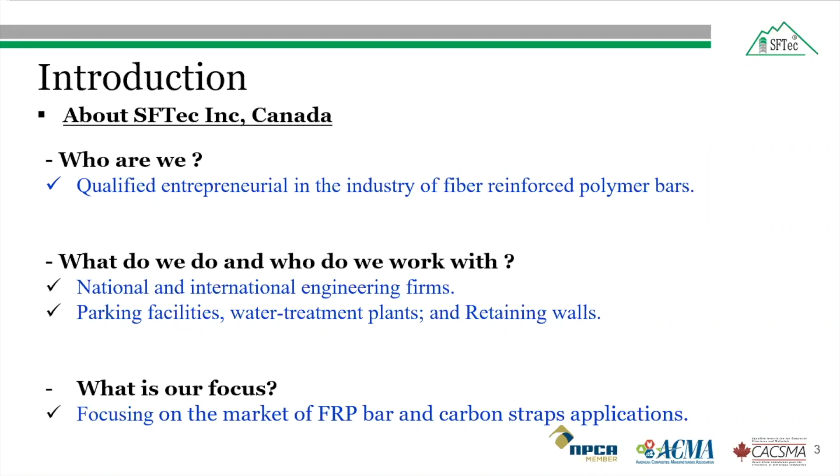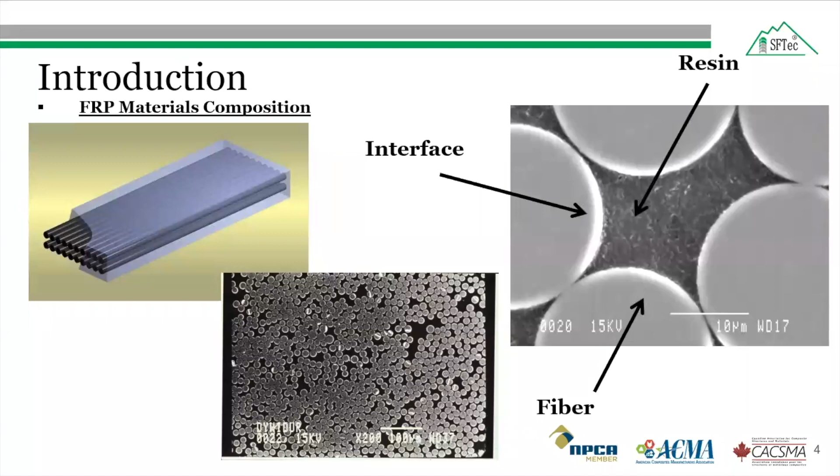There are generally four different types of fiber reinforced polymer bar nowadays, and in this figure we've shown only three: carbon, aramid, and glass. The stress-strain plot shows how these fiber reinforced polymer bars compare with steel bar. Two points should be noted: first, glass fiber reinforced polymer bar has lower strength compared to the other two FRP bars; second, the strength of all FRP bars is higher than steel bar. However, their behavior is linear elastic up to failure.

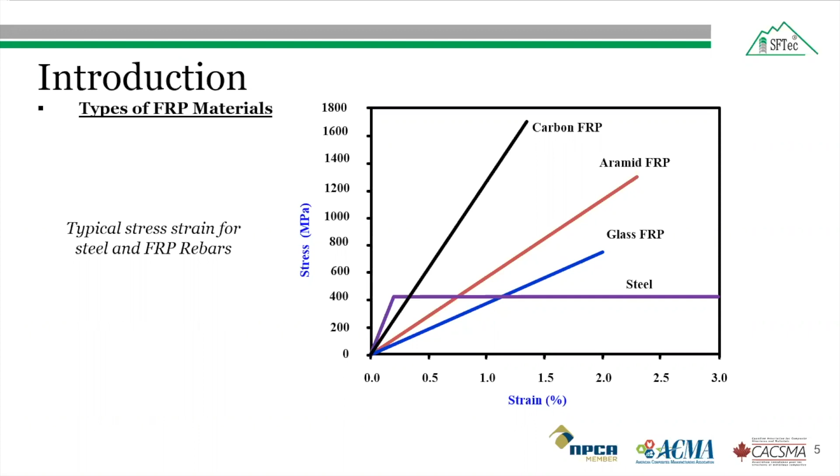We can produce different types of fiber reinforced polymer products depending on the project requirement. Some of the FRP bars we produce are straight bar, spiral, stirrups for transverse reinforcement, bent bars, and glass fiber reinforced polymer shear connectors.

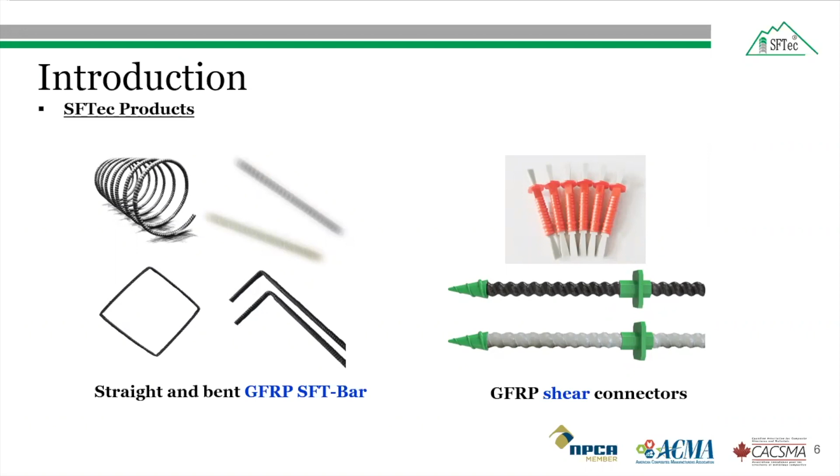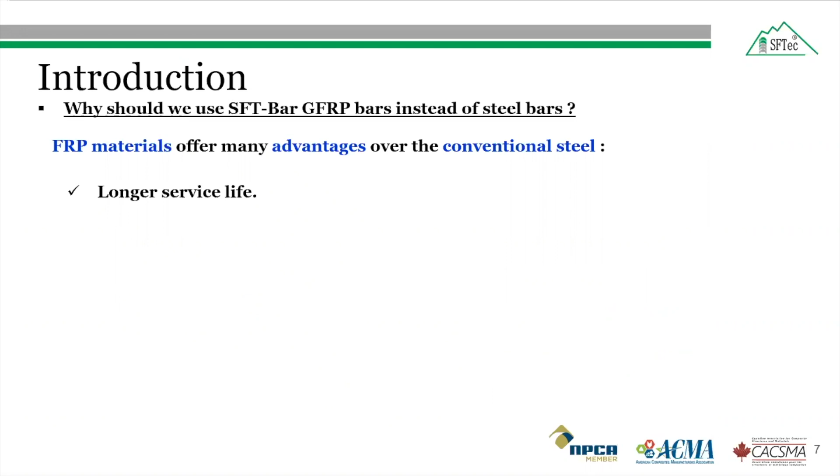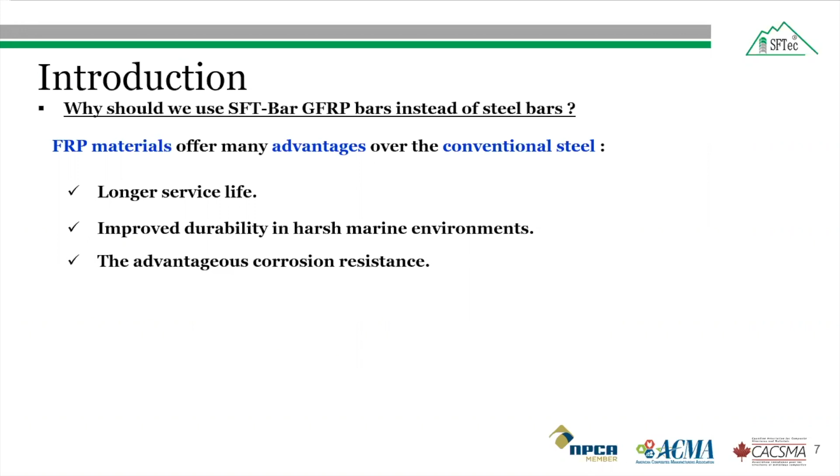Some advantages of SFTec glass fiber reinforced polymer bars over conventional steel bar: they have a longer service life because of corrosion resistance, therefore improved durability in harsh environments such as construction near coastal areas and in North American cold climates. The FRP bar has better resistance against corrosion compared to steel bar, and as mentioned earlier, the tensile strength of fiber reinforced polymer bar is 2 to 3 times more than that of steel bar.

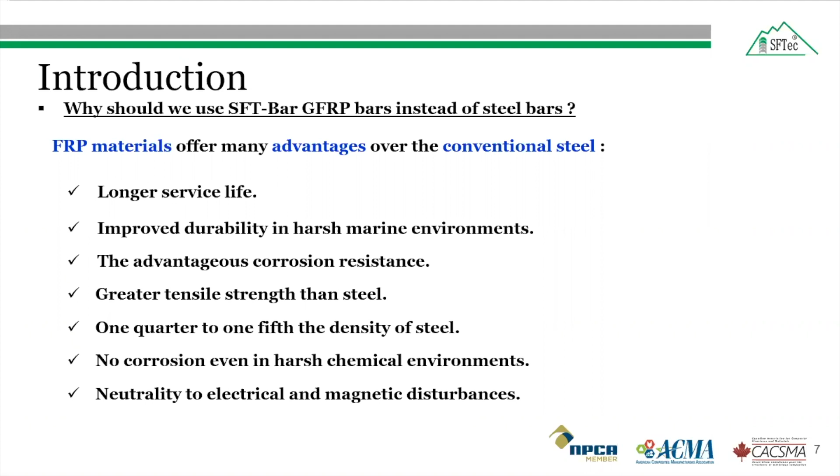However, it has more tensile strength. Fiber reinforced polymer bars are lighter due to low density compared to steel bars. And due to corrosion resistance, fiber reinforced polymer bars are good for harsh chemical environments as well. And it is neutral to electrical and magnetic disturbance, useful for applications such as airports, military applications, MRI rooms, and in hospitals.

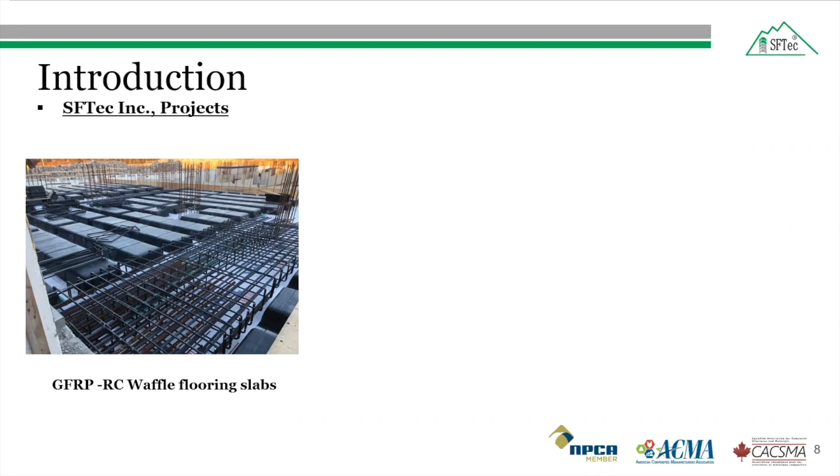So some of the selected field applications of SFTec fiber reinforced polymer bar, which we have already done in Canada. The GFRP reinforced concrete waffle flooring slab designed with SFTec glass fiber reinforced polymer bar, which was built in Halifax, Nova Scotia, and it can also be used for slab on grades. It is a non-structural slab, and it is a one-to-one replacement, and saved a lot of money compared to steel bar in terms of labor and transportation.

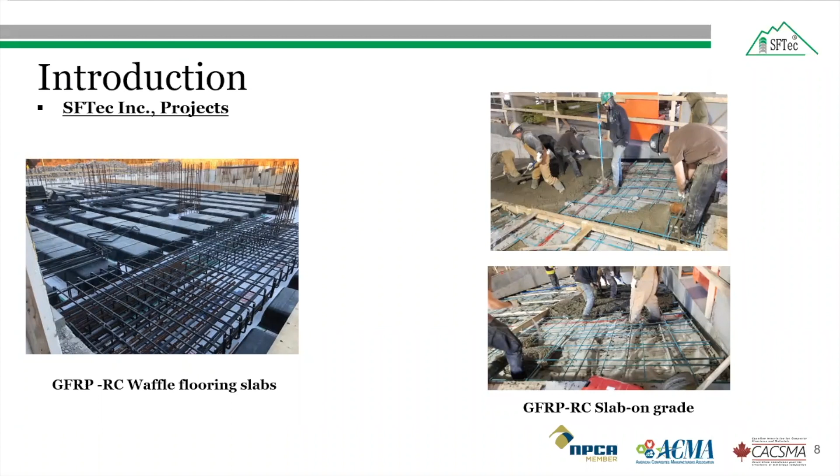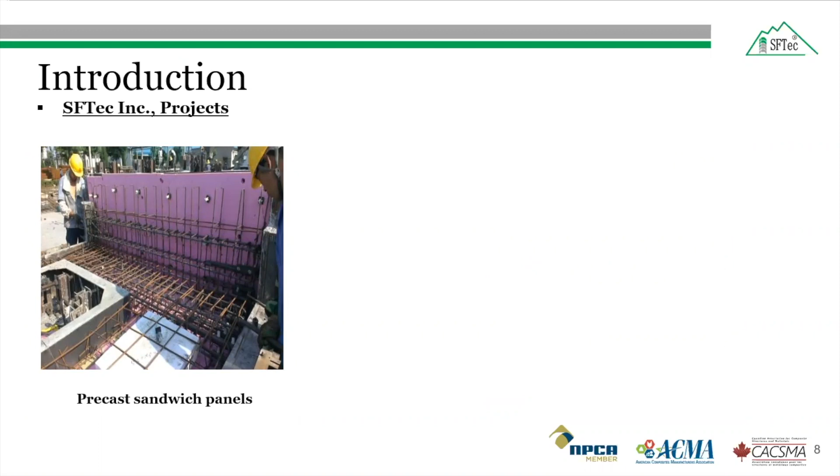So another project shows the cast-on-site precast sandwich panel, and they have used the SFTec glass fiber reinforced polymer bar in their project as reinforcement, and it was built in China. And on the right is a retaining wall built for the city of Montreal. The retaining wall is designed to dump snow with de-icing salts during the winter. So they built this retaining wall with the glass fiber reinforced polymer bar, which provided resistance against the chemicals used in the de-icing salts.

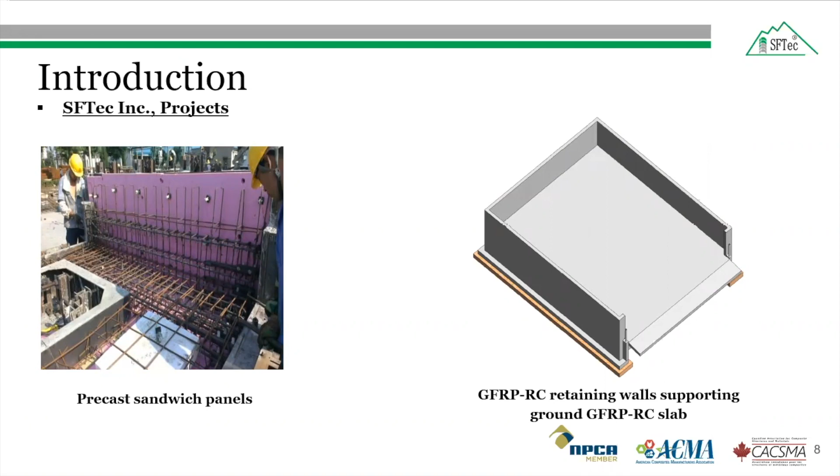Now, coming to the main presentation. So reinforced concrete columns have many practical applications. They are used in commercial buildings, emergency buildings such as hospitals, bridge piers in highway, railway and metro bridges, and flyovers. And with the increase in the sale of cars year by year, we will need more parking facilities and recreational areas. Those parking facilities will be multi-story parking facilities, which is built on concrete, reinforced concrete structures.

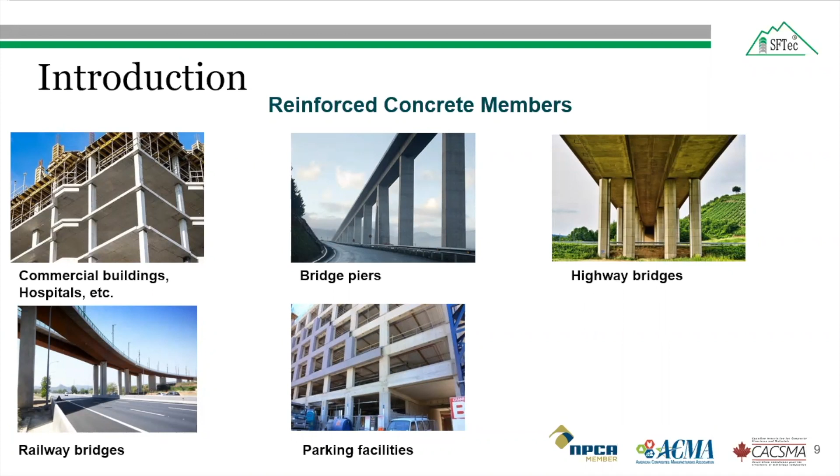And the practical application of concrete walls can be found in commercial buildings, high-rise buildings, bridge pier and abutment, and nuclear facilities and underground parking garages.

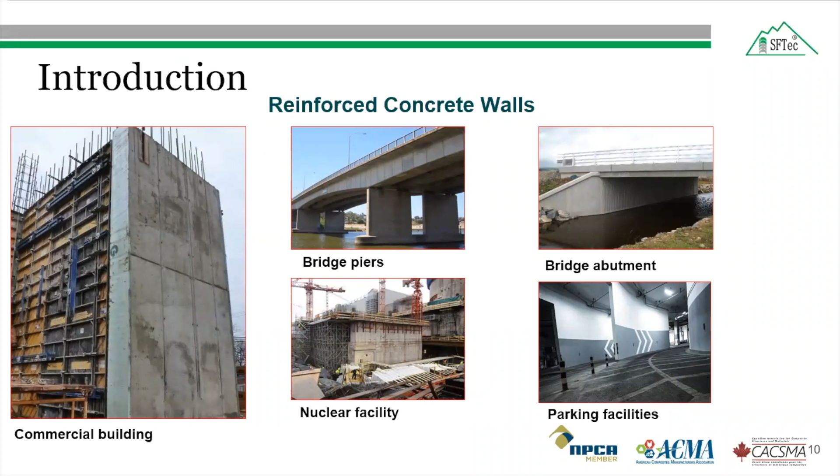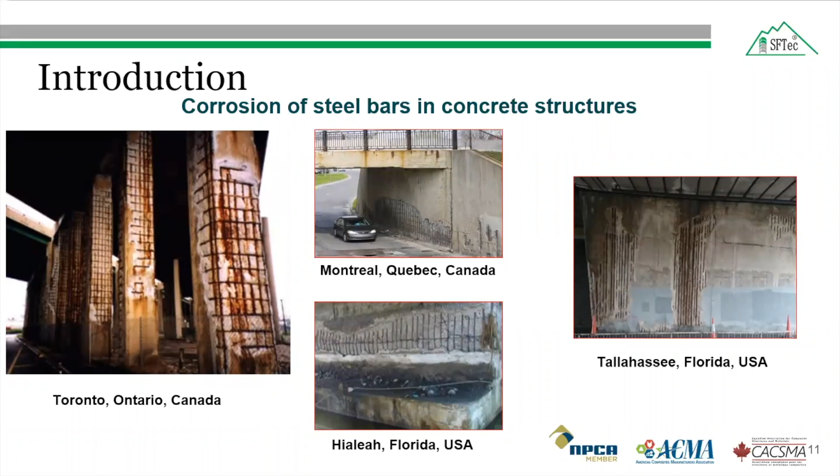And as we all know, there has been a problem of corrosion with the traditional steel bar in reinforced concrete structures. What is this? The expansion of the steel due to the resulting rust creates tensile stresses in concrete, which lead to cracking, delamination, and spalling, and finally leads to partial or full collapse. And in addition, the seismic design and evaluation of corroded sections have lower ductility, which means their plastic deformation is limited.

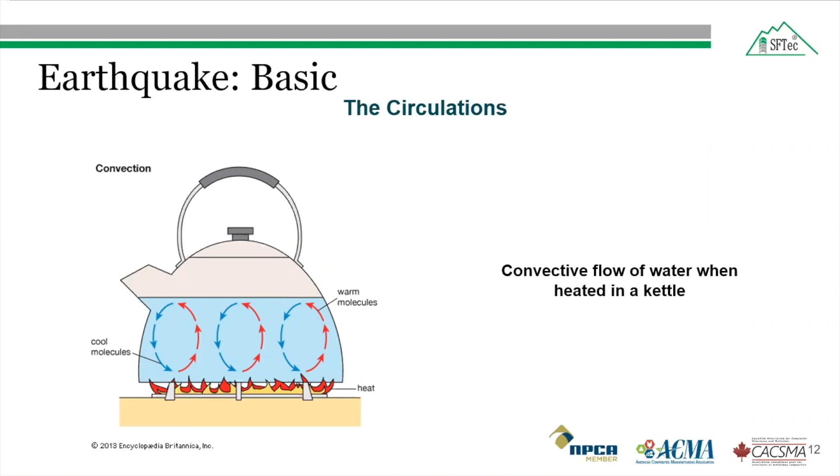So a similar kind of process can be observed in the earth's mantle. The earth is divided into the inner and outer core, the mantle, and the crust. And the crust is further divided into plates, which are called tectonic plates. And the convective current in the mantle causes the plates to move in different directions.

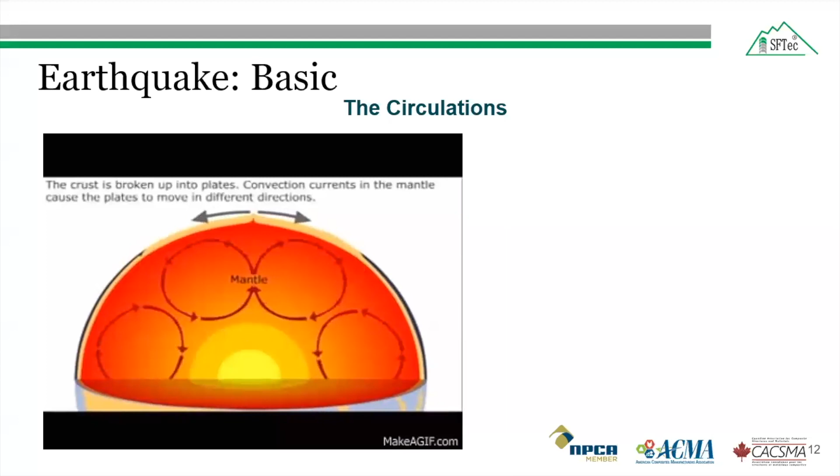So after moving in different directions, they form a large number of tectonic plates. And you can see here a lithosphere. In the lithosphere, it is comprised of large tectonic plates which have been moving slowly. And there are a total of 14 tectonic plates. And you can see through North America, near British Columbia and California, there is one tectonic plate moving. Let's see how it's moved.

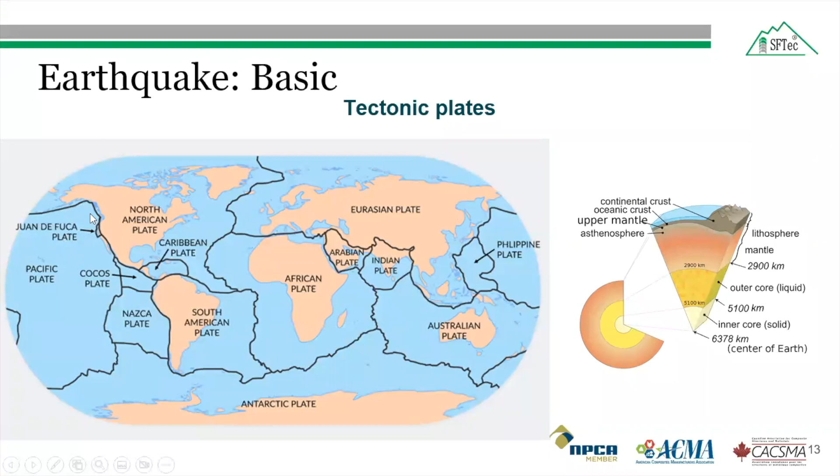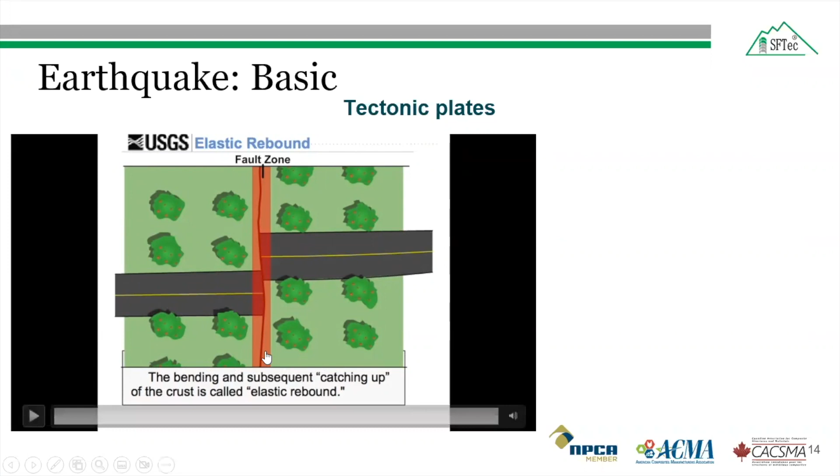So as the tectonic plates are slowly moving, their edges are locked in place, and this causes the bending of the crust along the plate's edges, which creates a fault zone. So there are two main classifications of faults: dip slip faults and strike slip faults. And the figure here is showing the strike slip fault in San Andreas, California, which is visible to the naked eye. So if you want to learn more about earthquakes, you can go to this link, and you can learn about faults and earthquake waves, which can be found at this link.

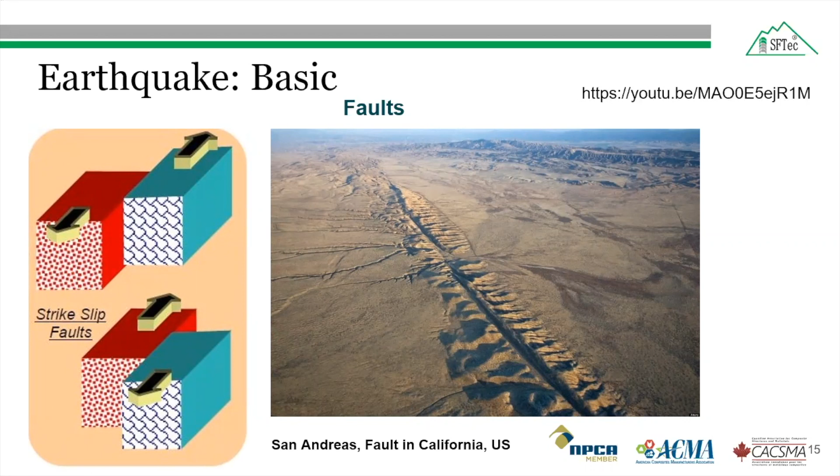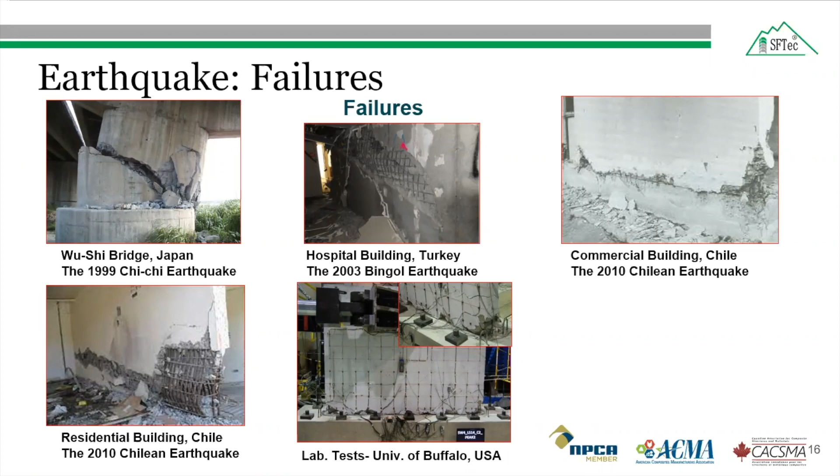Now, the failures due to an earthquake are devastating and can cause shear and compression failure, as shown in this figure. And fiber reinforced polymer can be helpful in controlling the damage during an earthquake, which will be discussed later in the presentation. So why should we select fiber reinforced polymer bars?

Because of the following characteristics, the fiber reinforced polymer bars have resistance against moisture, alkali effect, and chemical attack, which mostly depend on the selection of appropriate resin, manufacturing process, and application of protective coating. Therefore, the glass fiber reinforced polymer bars have resistance against deterioration due to chloride ions and carbonation.

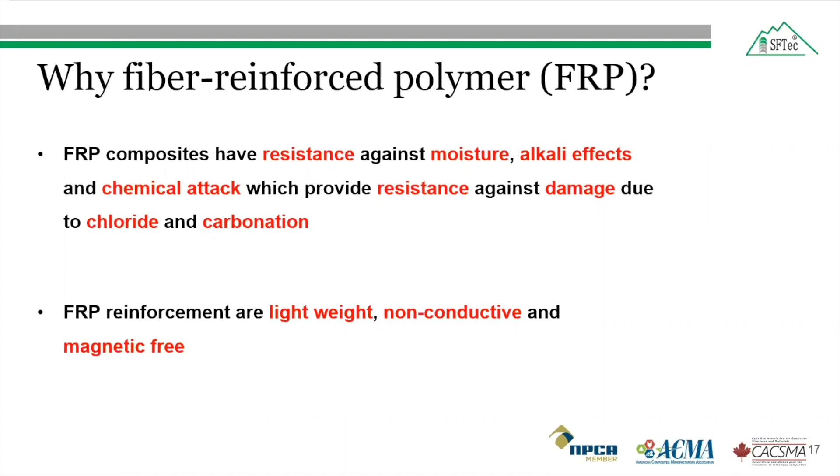The second point is the fiber reinforced polymer bars are lightweight, non-conductive, and magnetic free. The properties of the glass fiber reinforced polymer bar available at SFTec are the following.

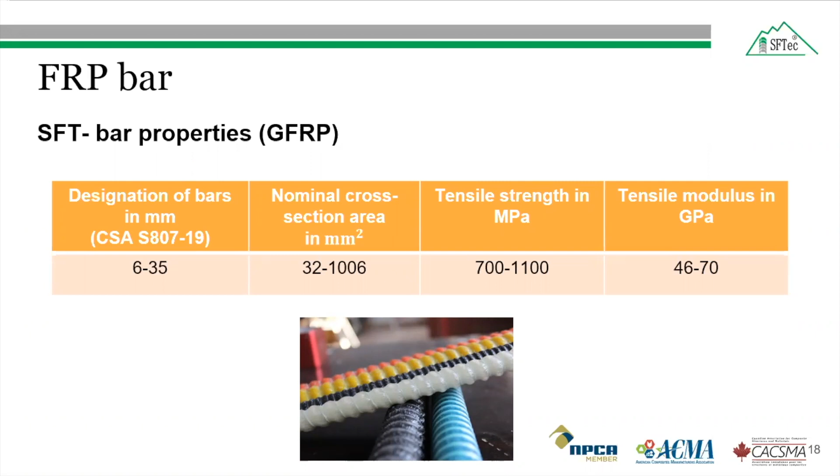The bar diameter generally varies from 6 mm to 35 mm, with a nominal cross-sectional area of 32 to 1006 mm square. The tensile strength depends on the bar type, whether it is classified as bar 1, 2, or 3, based on the CSA S807 code. The lower value of the tensile strength corresponds to the lower value of the tensile modulus or elastic modulus, which is 46 gigapascal.

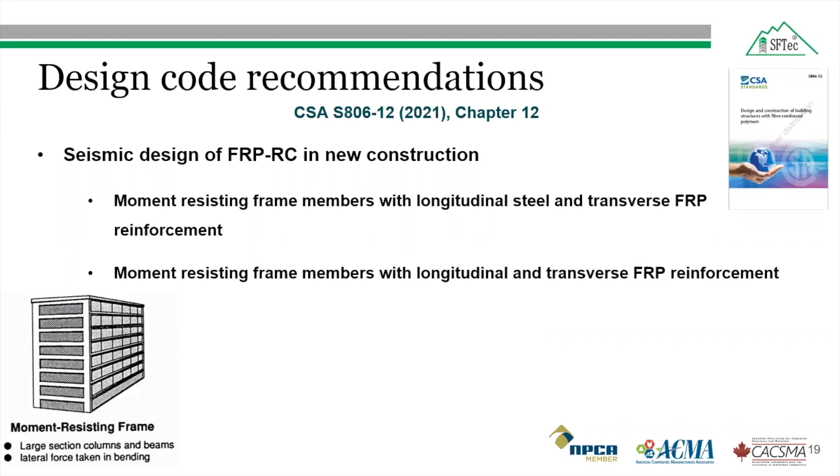So the Canadian design code CSA S806 provides guidelines for the seismic design of fiber reinforced polymer reinforced concrete members in new construction, given in chapter 12 of the CSA S806. The structural elements of the moment resisting frame can be either reinforced with longitudinal steel bar and transverse fiber reinforced polymer bar, or reinforced with fiber reinforced polymer bar in both the longitudinal and transverse directions. The members of the moment resisting frames are generally beams and columns, and the special detailing required for these members will be discussed in the following section, starting with the beams.

The beams should conform to the longitudinal requirement of CSA A23.3 in case of longitudinal steel bar, and the requirement of CSA S806 should be followed if you are using the glass fiber reinforced polymer bar as longitudinal reinforcement.

The beam of the moment resisting frame should be reinforced with transverse fiber reinforced polymer hoops or grids in accordance with chapter 7 of the CSA S806 code.

The transverse fiber reinforced polymer hoops or grids should be placed over a length equal to 2 times D, where D is the effective depth of the beam measured from the face of the connection, and over regions where plastic hinges or the most damage in the case of fiber reinforced polymer bar beams could occur, and should be reinforced for a distance equal to the beam effective depth on either side of this hinge region.

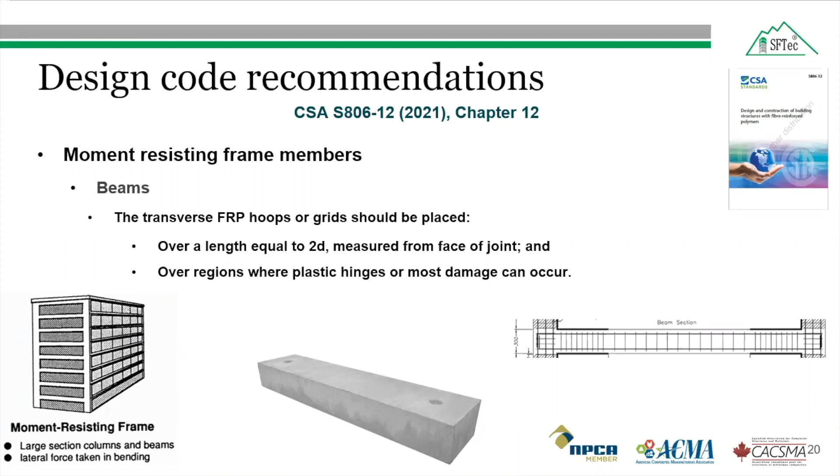The first fiber reinforced polymer hoop should be located not more than 50 millimeter from the face of a supporting member. The maximum spacing of the hoop should be the minimum of 1/4 of effective depth, 8 times the diameter of the smallest longitudinal bar, 24 times the cross-sectional dimension of the fiber reinforced polymer hoop, and 300 millimeter.

Further, the shear resistance of the beam should comply with chapter 8 of the CSA S806. As you can see in this figure, generally the hinge will form at the end and support end. Here you can see a special detailing is provided with the FRP hoop.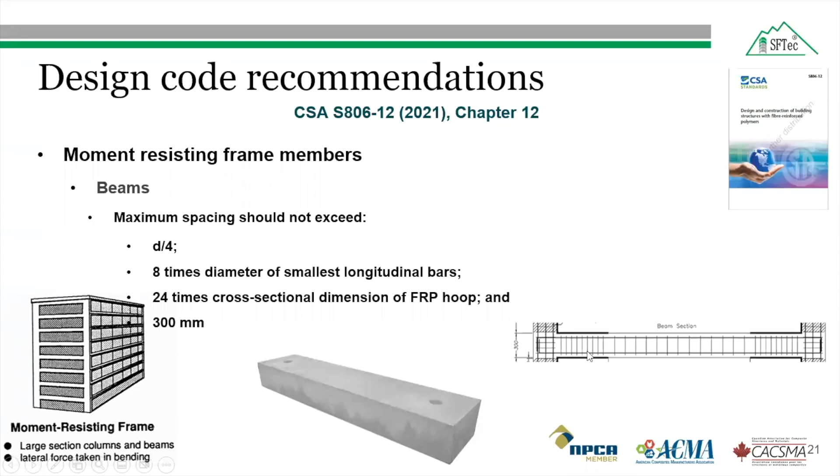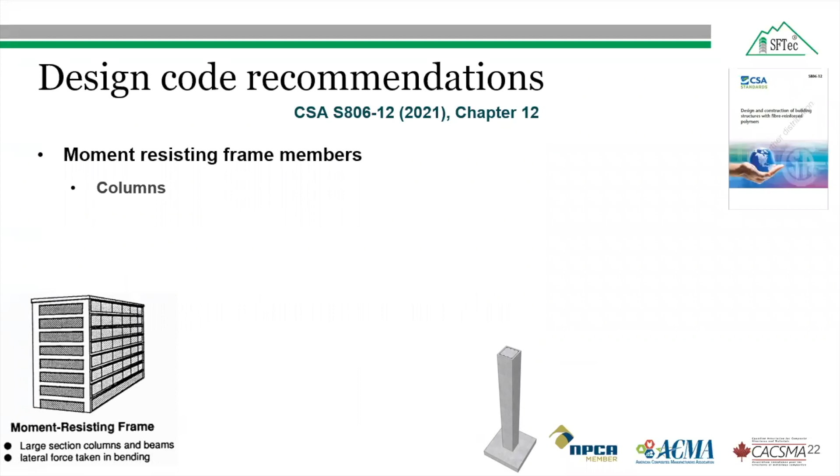The column member of the moment resisting frame should satisfy the relevant seismic provisions of CSA A23.3 with longitudinal steel reinforcement, and the transverse fiber reinforced polymer reinforcement should be provided in the form of either circular spirals, hoops, rectilinear hoops, overlapping hoops, grids, or cross ties, as shown in the figure below.

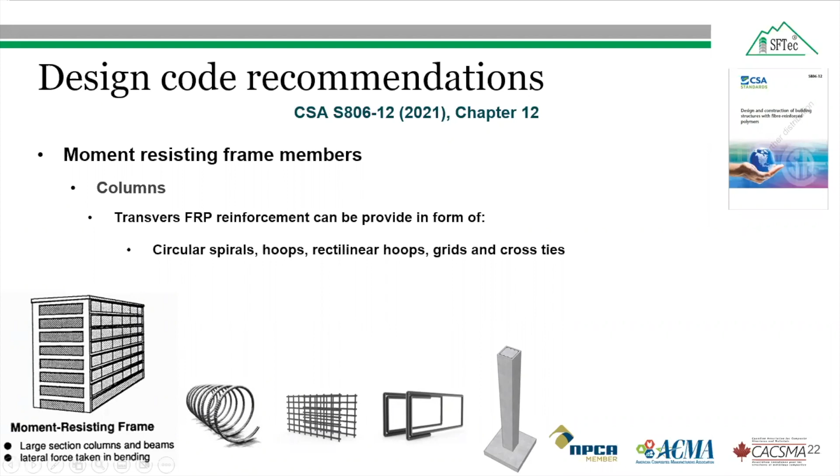The required area of the transverse FRP reinforcement should be calculated using the equation shown here. The P by P naught is the axial load ratio, which should be greater than or equal to 0.2, and AG by AC minus 1 should be greater than or equal to 0.3.

The delta shown here is the design lateral drift ratio, which is generally 4% for the moderate ductility requirement. KC is the confinement efficiency coefficient, which is generally taken as 1 for circular spiral or circular hoops.

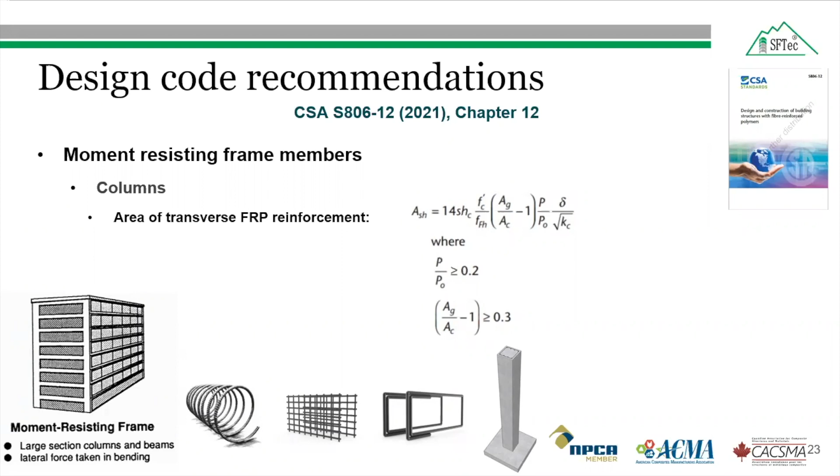The transverse FRP reinforcement should be spaced at a distance not exceeding the minimum of 1/4 of the minimum member dimension, 150 millimeter, or 6 times the diameter of the smallest longitudinal bar.

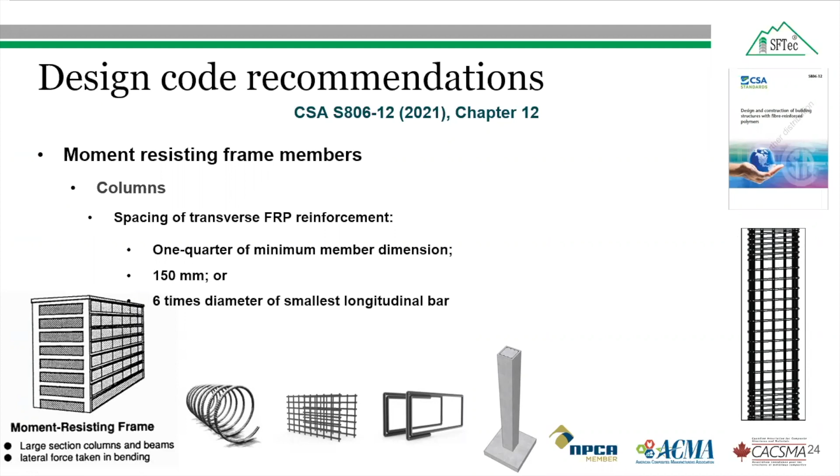The special moment resisting frame detailing of the transverse fiber reinforced polymer reinforcement should be provided in the plastic or most damaged region. You can see here at the top and at the bottom, where the columns are generally connected, is where you find the most damaged region. That's why this special detailing should be provided at the ends.

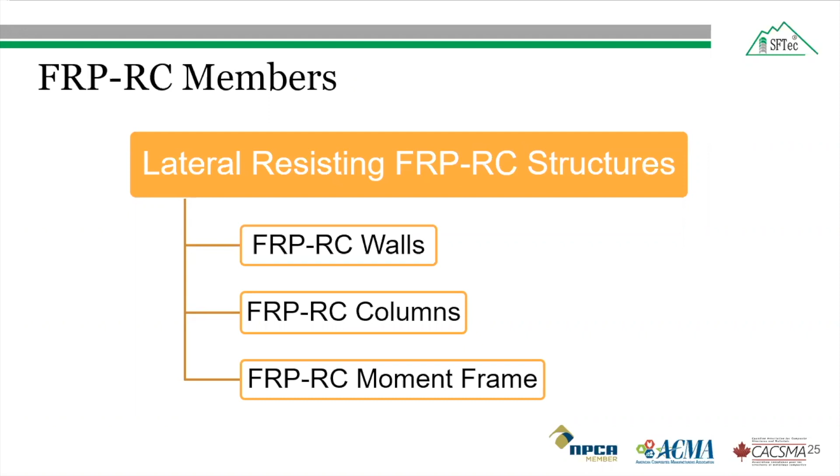In the present presentation, concrete members reinforced with fiber reinforced polymer bars are divided into three sections: walls, columns, and moment frames, which I will discuss one by one. So first, starting with the concrete walls.

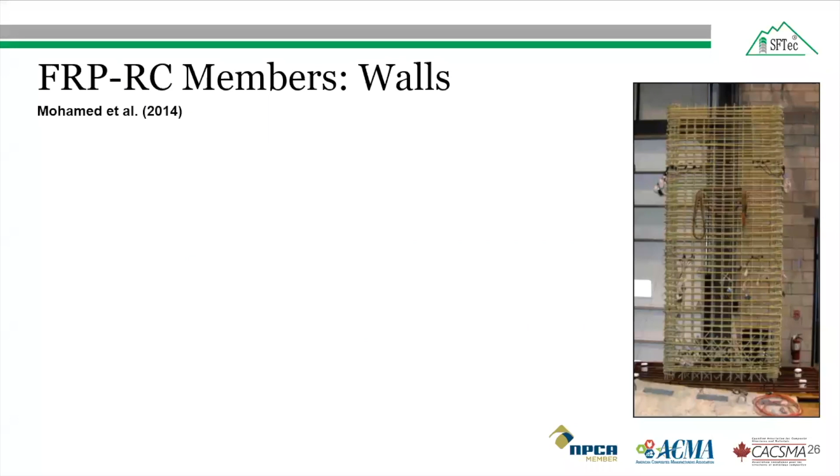The experimental testing of the lateral resisting structural member was conducted in 2014 with full-scale glass fiber reinforced polymer reinforced concrete shear walls. All the GFRP reinforced shear walls achieved flexural strength with no sign of premature shear, sliding, bond, or anchorage failure, and they attained a drift ratio of over 3%. The advantage of GFRP reinforcement was no permanent deformation up to 80% of the ultimate capacity of the shear wall.

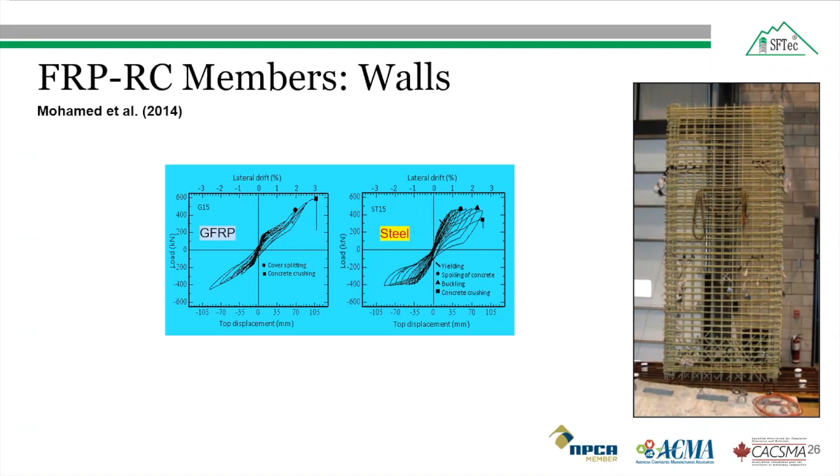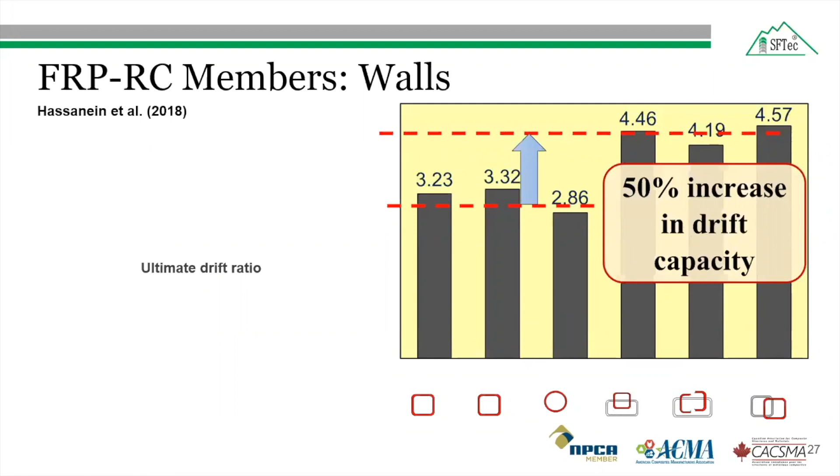Further testing of 6 full-scale shear walls with different boundary elements showed that more confinement in the boundary element of the wall enhanced the drift capacity of the wall. As you can see here, confinement was doubled in these 3 shear walls, resulting in an increase in drift capacity by 50%. The crack width of the shear wall with more confined boundary elements decreased by 40%.

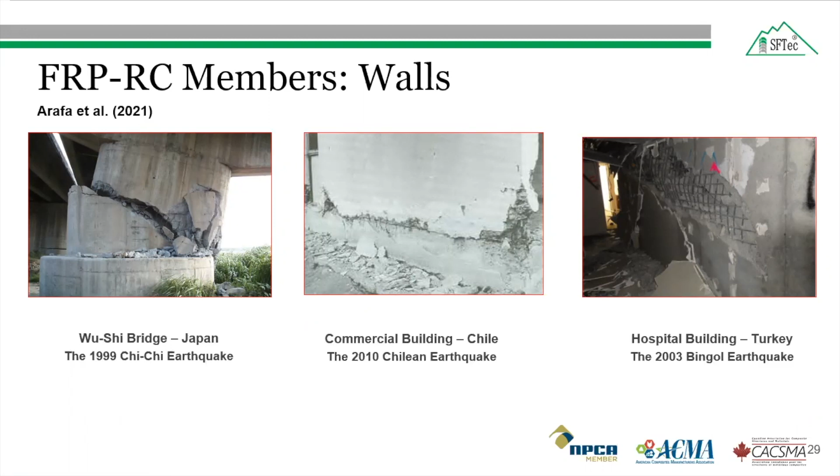Due to the lack of experimental results on hybrid reinforced squat walls - hybrid meaning both reinforcement types, steel and glass fiber reinforced polymer bars, are used in building the shear wall - a finite element model was built.

The model was validated based on previous results on GFRP reinforced concrete walls. The specimens were representative of bridge pier walls in the strong direction. The bidiagonal web reinforcement was glass fiber reinforced polymer bar, while all the main reinforcement, the vertical bars, were steel bars. Only the horizontal bars and the ties for the boundary element were GFRP bars.

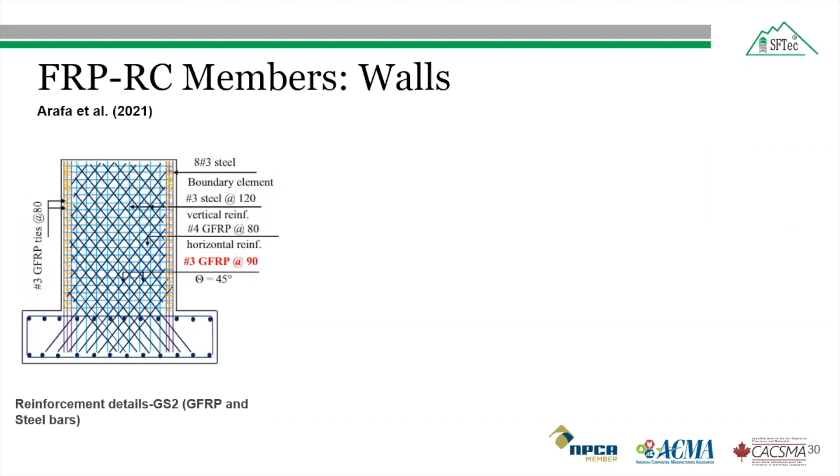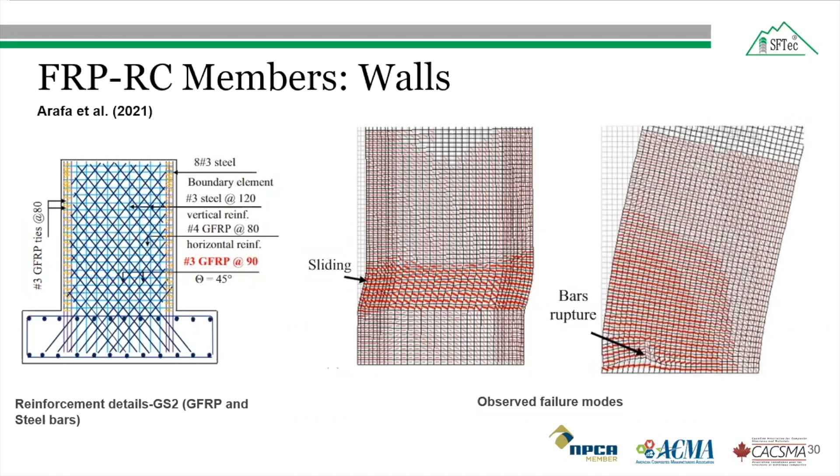The finite element analysis provided accurate simulation of the experimental response of the tested steel and glass fiber reinforced polymer concrete bridge pier walls.

Extending the GFRP bars, either arranged diagonally or vertically along the wall height, was necessary to ensure their effectiveness in controlling damage. Further, they satisfy the demand for ductile recoverable performance up to a maximum drift of 2%, as recommended by ASCE 41. The residual drift of the wall with vertical or diagonally arranged GFRP bars was low compared to the wall reinforced with steel bars.

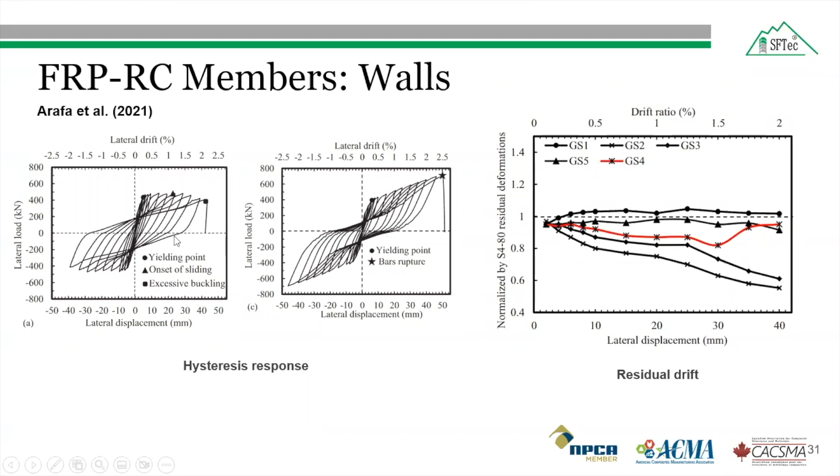As you can see in this figure, which shows the residual drift, the shear wall reinforced with GFRP bars at the diagonal web was much lower. You can also see from the hysteresis response that the residual drift is very low compared to the specimen reinforced with steel bar.

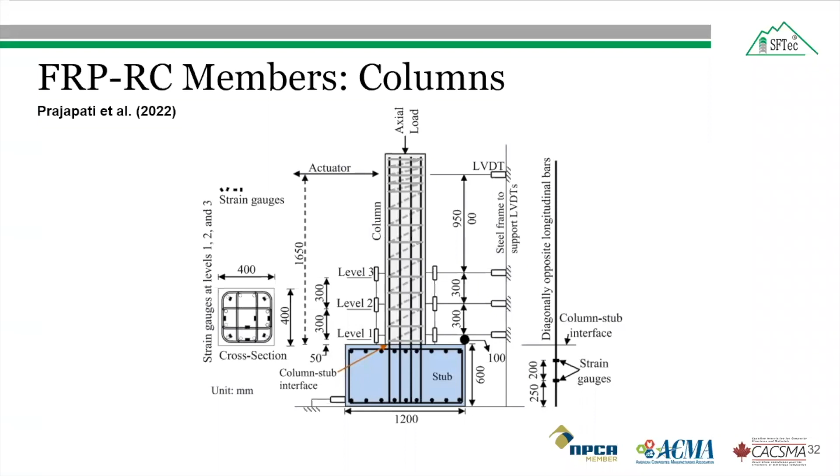Now coming to the columns. Reinforced concrete columns were tested to study the confinement effect of glass fiber reinforced polymer spiral and cross tie on concrete columns longitudinally reinforced with GFRP or steel bar.

The failure mechanism for the first tested GFRP reinforced concrete column: first crack occurs, then more tensile cracks begin to appear on further drift cycles. The concrete cover starts to split vertically, and on further increment of the drift, the concrete cover starts to fall. The longitudinal reinforcement interlaminar degradation was seen.

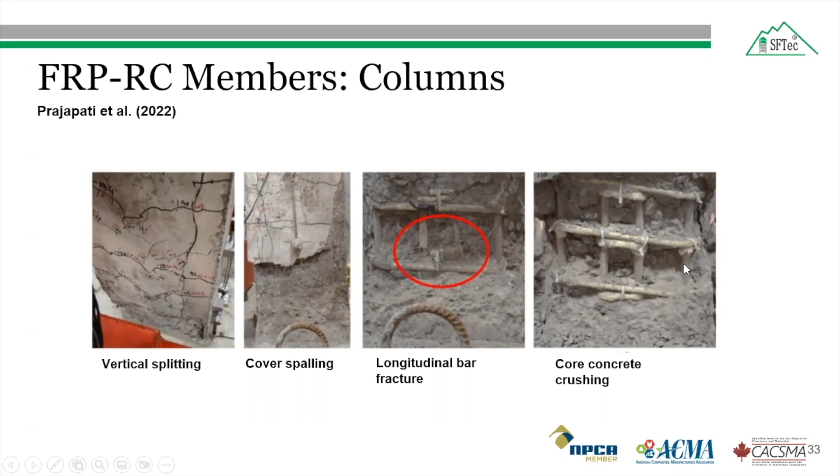After that, there was a fracture of the longitudinal GFRP bar in compression. On increasing the drift, the cross tie ruptured, and finally the core concrete began to crush.

The maximum strain attained by all the GFRP spiral and cross tie was lower than 6,000 microstrain, which was lower than the requirement in CSA S806 design code. The GFRP spiral and cross tie doesn't show any failure for most of the tested columns, which shows its effectiveness in confining the concrete column core.

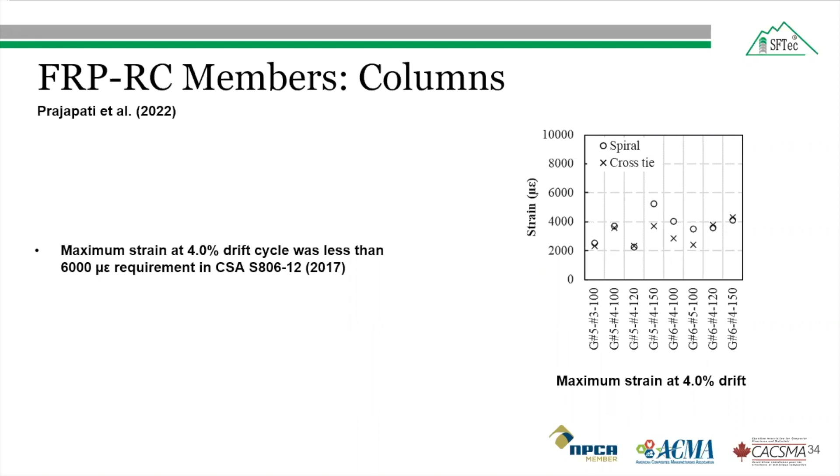Glass fiber reinforced polymer reinforced concrete columns could be suitable for medium rise structures in low to moderate seismic zones. The compressive behavior of GFRP bars in GFRP reinforced concrete columns doesn't provide the plasticity required for seismic response, making it more likely to fail in a brittle mode.

Therefore, concrete columns with hybrid reinforcement consisting of longitudinal steel bar and transverse GFRP spiral cross tie were tested, because research has shown that this can provide better resistance against corrosion than a column completely reinforced with steel bars.

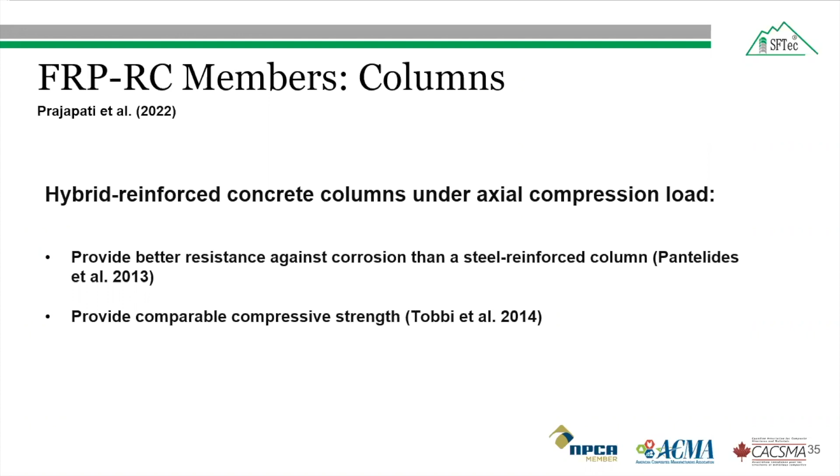Therefore, hybrid reinforced concrete columns consisting of longitudinal steel bar and transverse GFRP bar were constructed. The figure shows the casing of the hybrid reinforced concrete column, with longitudinal steel bar and transverse glass fiber reinforced polymer bar. The failure progression of the hybrid reinforced concrete column was rapid compared to the glass fiber reinforced polymer bar column, with the occurrence of all the same milestones as in the GFRP reinforced concrete columns.

Here we can see the buckling of the steel reinforcement and the fracture of the steel bar, which was different from what we observed in the glass fiber reinforced polymer bar concrete column.

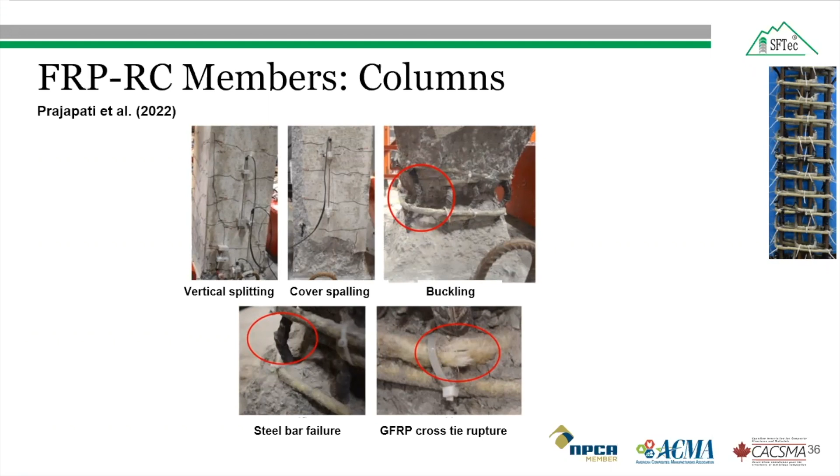The lateral strength in the hybrid reinforced concrete column increased until severe concrete cover spalling and started to degrade thereafter, which was opposite to what was observed in the glass fiber reinforced polymer reinforced column, where the lateral strength increased until the failure of the column.

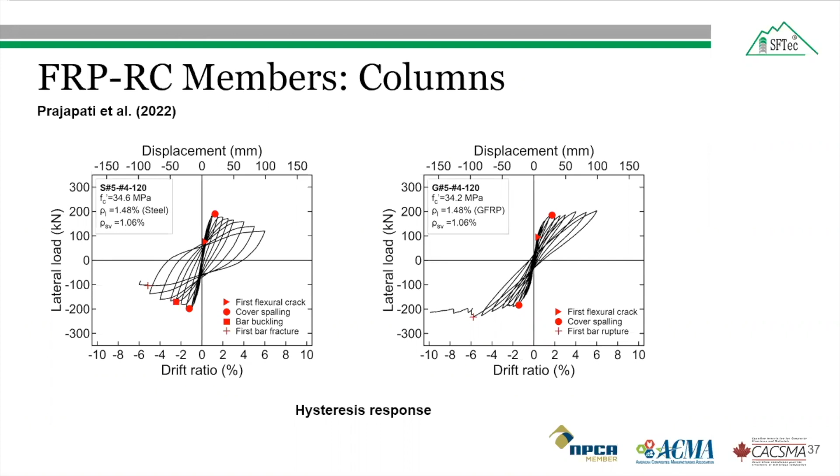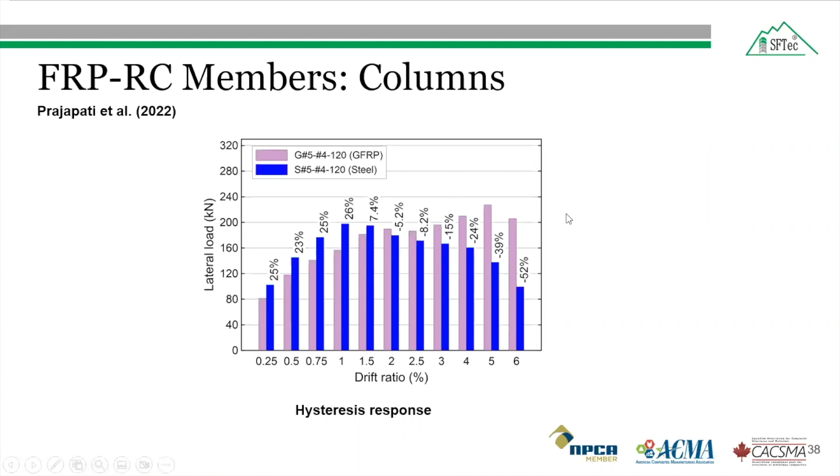Due to the higher stiffness of the steel bar than the glass fiber reinforced polymer bar, the lateral load was more in the initial drift cycles, but after 1.5% drift ratio, it reversed, and the concrete cover deterioration meant more lateral loads were absorbed in the glass fiber reinforced polymer concrete column. Finally, the GFRP reinforced concrete column attained more lateral load than the hybrid reinforced concrete column.

The strain developed in the longitudinal steel bar at various levels above and below the column stub interface were compared. The strain in the longitudinal steel bar showed a jump after the yielding of the steel bar, and at 2% drift ratio, strain hardening caused the strain to redistribute.

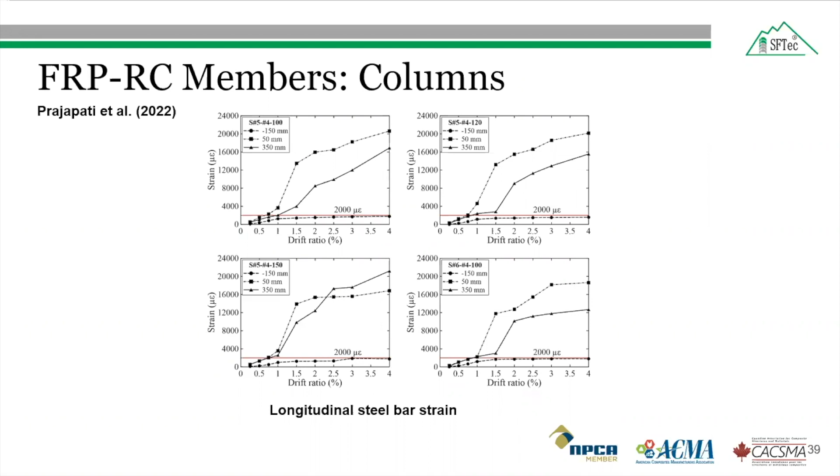The strain gauges installed 150 millimeters below the column stub interface recorded strain lower than the yield strain, showing that the development length of the longitudinal steel bar was adequate. This observed phenomenon was similar to observations in past research for concrete columns confined with steel ties.

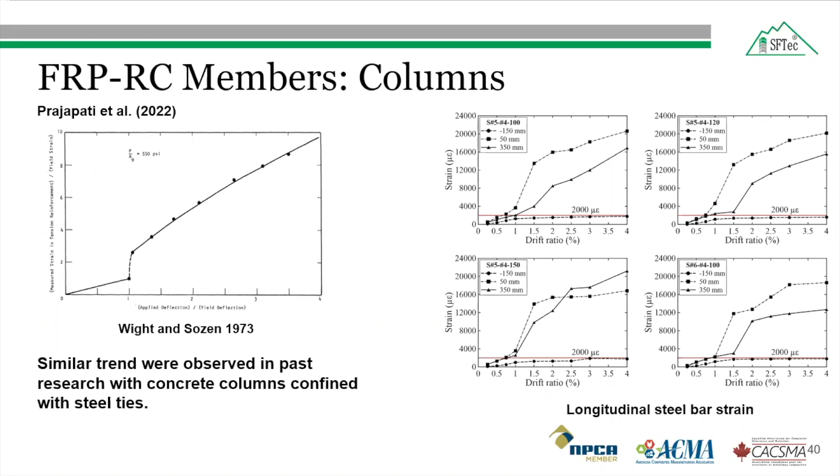Therefore, the behavior of the longitudinal steel bar was unaffected by the type of transverse reinforcement used, either steel or GFRP. So you can replace the steel transverse reinforcement with GFRP reinforcement, and the behavior will be almost the same, while the structure will be more corrosion resistant. The glass fiber reinforced polymer spiral and cross tie effectively confined the concrete column after the yielding of the longitudinal steel bar.

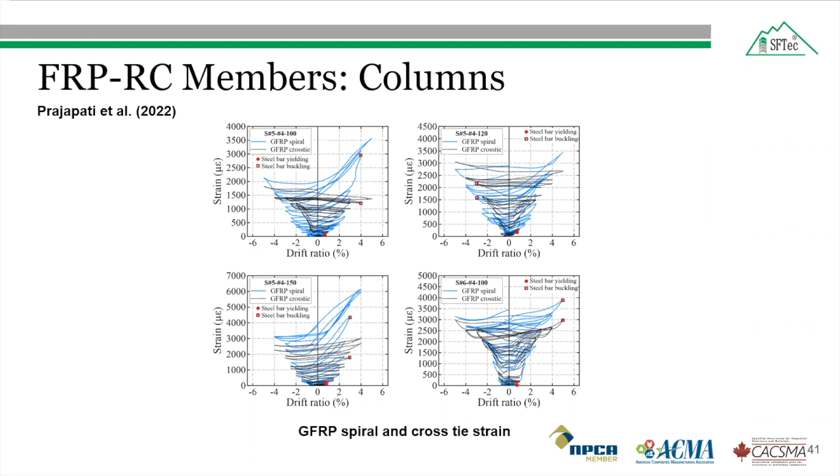The confinement effectiveness of steel ties beyond a steel strain of 2000 microstrain was generally found to be insufficient, whereas the strain developed in the GFRP spiral and cross tie went beyond 2000 microstrain and provided effective confinement until the failure of the specimen.

The seismic behavior of concrete moment frames reinforced with glass fiber reinforced polymer bar were studied using pushover analysis. The intermediate moment frames were 3 and 5 stories with 2 or 3 bays, as shown in this figure, and were designed using ACI 440.

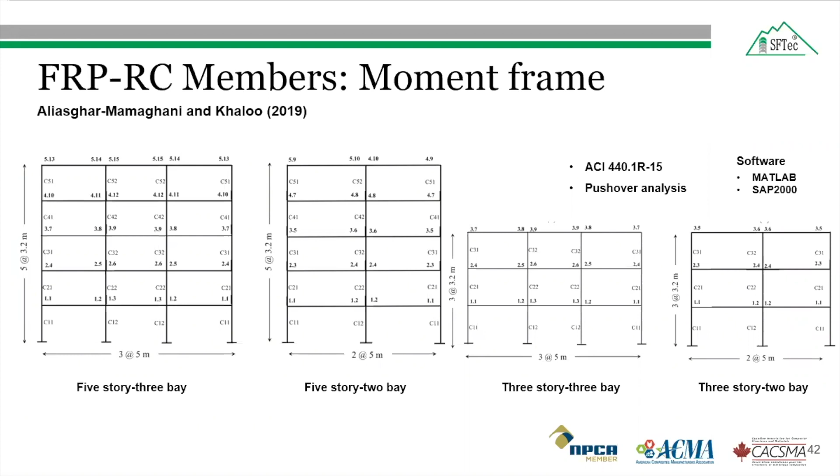A computer code using MATLAB was developed for seismic design of moment frames. The developed code in MATLAB has the capability to model materials and geometries in SAP 2000, which then derive forces and design the members. The results from the study included the moment curvature curves at the plastic hinge region for beam sections.

These were the beam sections of the 3-story 2-bay and 5-story 2-bay moment frames, reinforced with GFRP and steel bars, compared. The GFRP bar reinforced section behaved linearly, however provided higher moment capacity than the section reinforced with steel bar.

The moment capacity of the beams reinforced with GFRP bars compared to those reinforced with steel bars was always more than 1, attaining a maximum value of 1.5 times the moment achieved by the steel members. Therefore, considerable moment capacity of the GFRP reinforced section can be achieved even with a low reinforcement ratio for resisting the positive moment.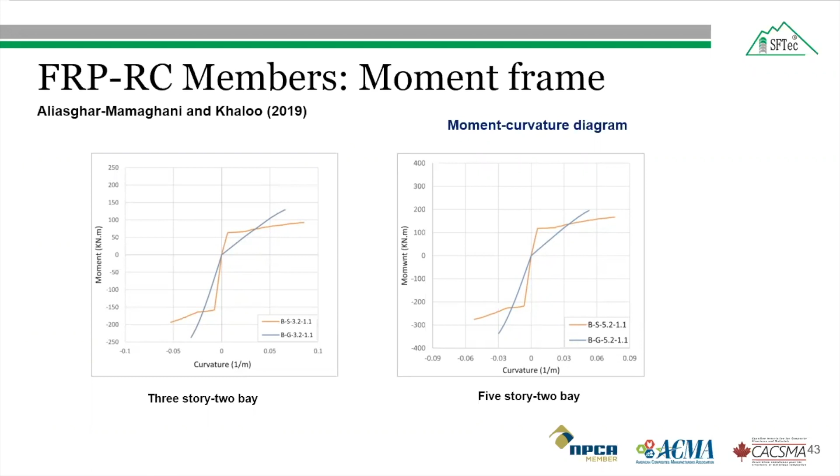As seen in the moment-curvature diagrams, the moment frames reinforced with GFRP bars show high load carrying capacity because the GFRP bars possess higher tensile strength than the steel bar.

However, due to the linear behavior of GFRP bars, moment frames reinforced with GFRP bars behave less ductile in comparison with moment frames reinforced with steel bars.

As the aspect ratio, which is the ratio of the height to the width of the frame, decreases, moment frames reinforced with GFRP bars displayed better performance regarding deformability and base shear capacity. Here you can see the 5-story and 3-story frames. The 3-story frame with GFRP reinforcement showed better deformability compared to the 5-story GFRP reinforced moment frame.

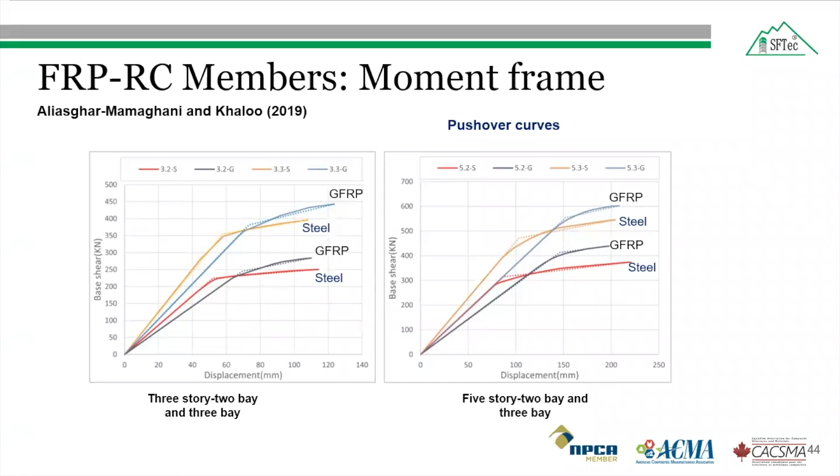The initial stiffness of the pushover curves for the 3 and 5-story GFRP reinforced moment frames were 20% lower, as we can see here in the initial stiffness. Generally, GFRP initial stiffness was always lower compared to steel, because steel has a higher elastic modulus compared to glass fiber reinforced polymer bars.

The hinging pattern of the steel reinforced moment frame, shown here, displayed a desired beam sideway mechanism. In other words, it showed a strong column, weak beam mechanism.

Whereas the hinging pattern of the frame reinforced with GFRP bars conformed to a weak column, strong beam condition, leading to the formation of plastic hinges in the columns of the middle story, as you can see here, which resulted in a column sideway mechanism due to the failure of the column in the third story.

So the top story beam of the GFRP reinforced moment frame doesn't provide ductile performance due to the linear behavior of the GFRP bars, which changes the failure of the frame from a beam to a column sideway mechanism, which is not desirable during an earthquake.

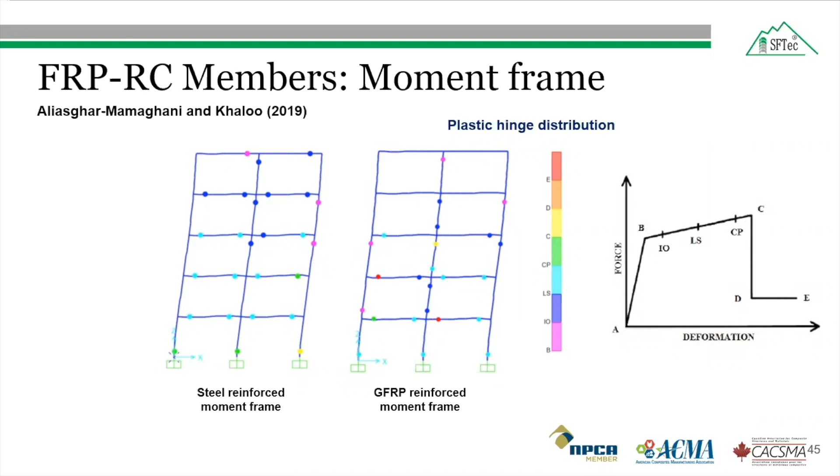Therefore, GFRP reinforced moment frames need attention to avoid such soft story phenomena, and this can be avoided by providing higher stiffness to the columns in GFRP reinforced moment frames. So where we find columns with a soft story phenomenon, we can use hybrid reinforcement, using longitudinal reinforcement as steel and transverse FRP reinforcement.

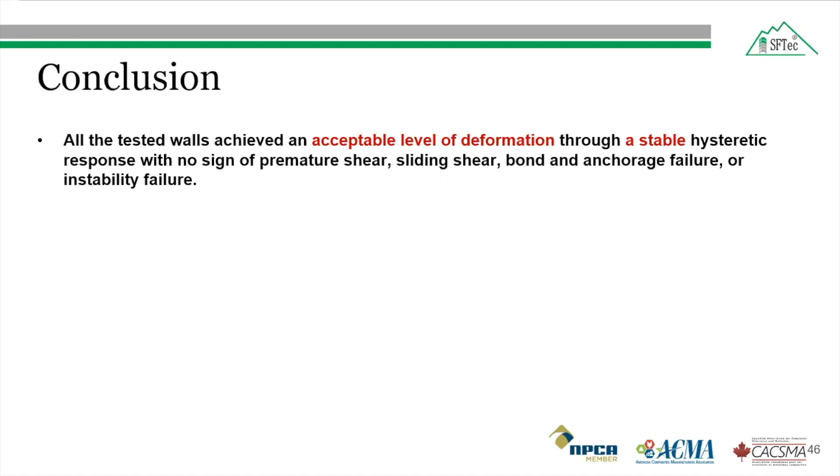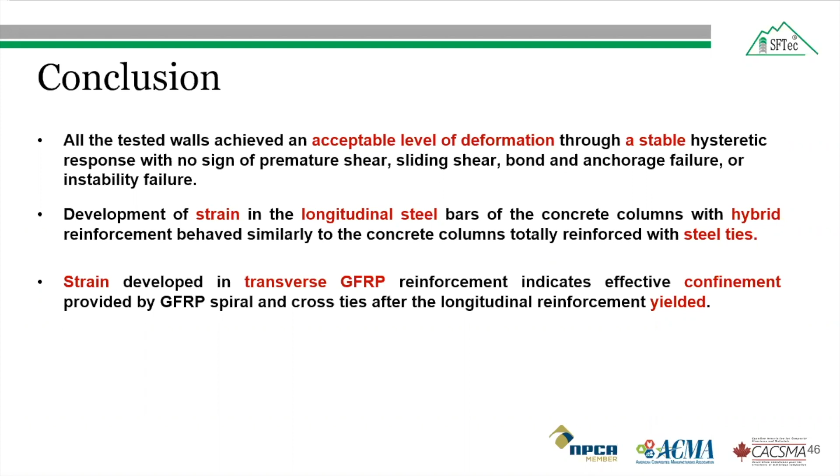In conclusion, the tested walls, irrespective of their aspect ratio, achieved an acceptable level of deformation through a stable response with no sign of premature failure. The strain developed in the longitudinal steel bar showed that it was unaffected by the type of transverse reinforcement used, either steel or GFRP. The GFRP cross tie effectively confined the hybrid reinforced section after yielding of the longitudinal steel, and the GFRP spiral becomes more effective in confining the column core after the concrete cover falls off.

The linear behavior of GFRP bars, with considerable strain capacity, puts it in a position to be considered mainly in frames demanding linear behavior and frames with low to intermediate story levels. As I showed, if the aspect ratio of the story is low, then the GFRP performs better.

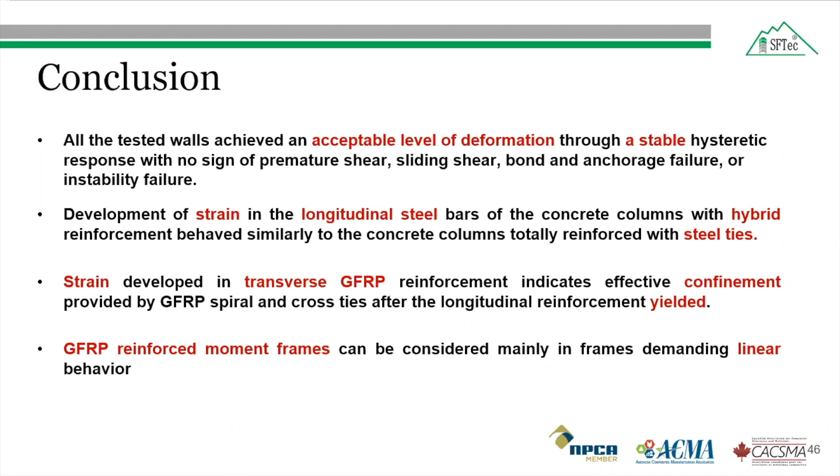Further, the soft story phenomena in GFRP reinforced moment frames can be avoided by providing higher stiffness to the columns or vertical members, which can be achieved by using hybrid reinforcement with steel as vertical members, as shown in the research on shear walls and hybrid reinforced concrete columns.

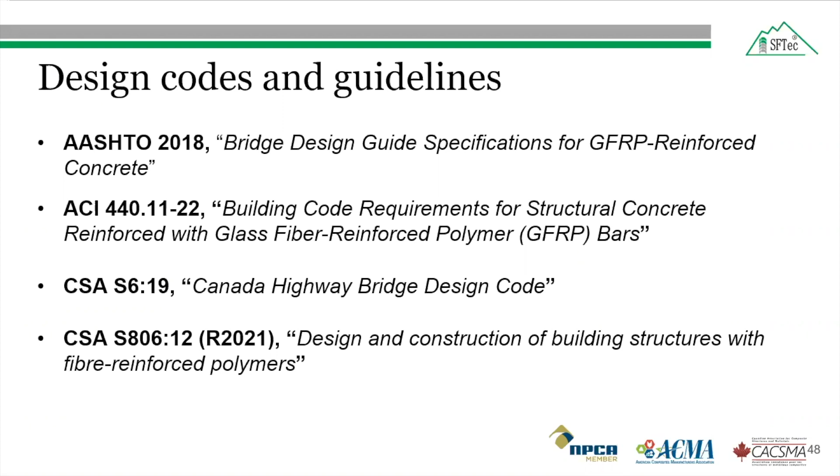These are the North American design codes and guidelines for FRP bars in concrete structures. ACI 440 only recommends the use of GFRP bars in case of B or C seismic design categories, whereas CSA S806 and S6 give complete guidelines for the use of GFRP bars, either as hybrid reinforcement with longitudinal reinforcement as steel and transverse reinforcement as FRP. Thank you for your kind attention.